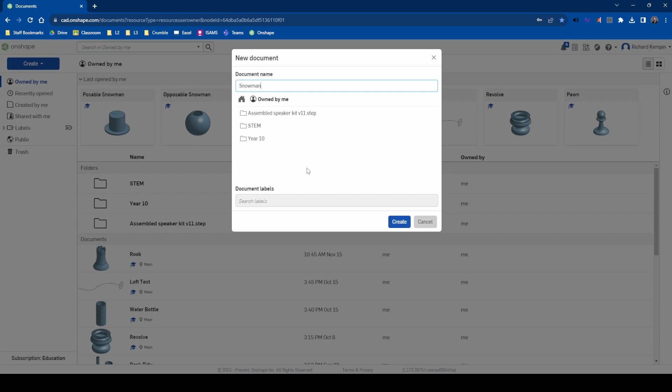To get started, we're going to go to Onshape and create a new document. You can call this a posable snowman, or just snowman. If you want to put it into a folder, you can—I'm just going to keep it in my own section for now.

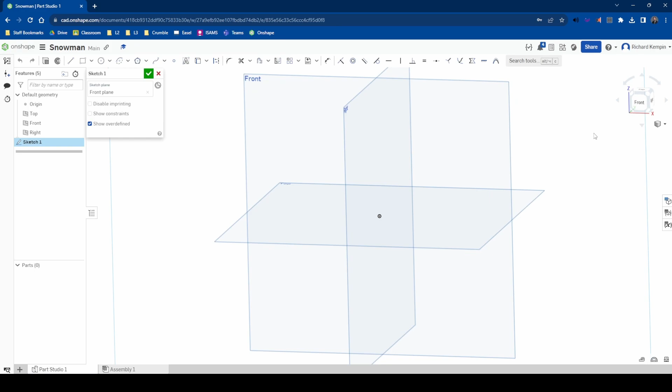Once this opens, we're going to start with the first part, which is going to be the base piece. We're going to click on our front plane, click sketch to create a new sketch, and click on the front orientation to make sure we're looking square on at what we're drawing. It's important to stay away from the right click button on the mouse, as clicking that might accidentally drag you out of orientation, making your views a little harder. If this happens, just click on the front orientation block and you're back to where you need to be.

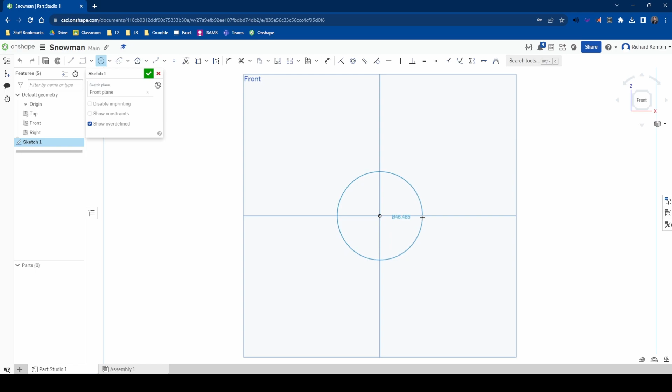So we're going to start with a circle—shortcut key C, or you can click up here for circle—and use the central coordinate system, the central point on the axis here. We click, drag out, and click again. While the white box is active, we type in the dimensions we want. For this first one, we want a diameter of 50 millimeters, so type 50 and press enter.

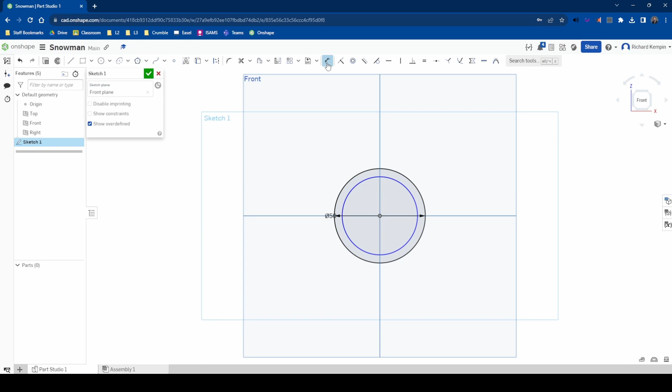We're going to do the same thing again on that same center point, and click again. If you miss this white box and it goes blank, you can press D for the dimension tool, or find it up here. Click on that, click on your circle, and it'll give you the ability to give a dimension. For that, we want 48. This will give us a wall thickness of 1 millimeter all the way around.

We're now going to draw two lines across the bottom. We want them both intersecting both circles. As I hold my mouse there, my line is not blue, but blue and yellow dashed. If I move it away from where I've got it, it becomes blue again. If I hold it here, it's blue and yellow dashed, meaning it's perfectly horizontal, which is what we want—a nice flat line to hold our circle in the correct orientation.

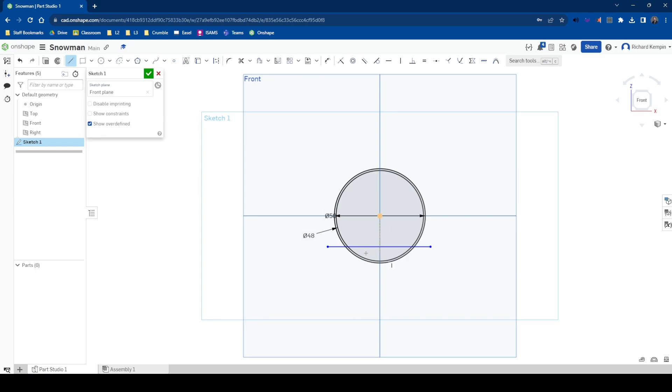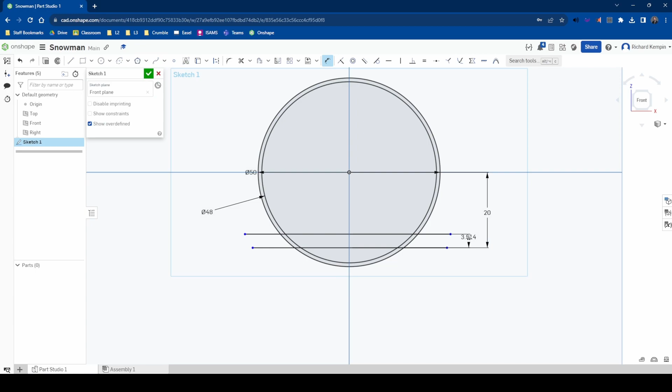I'm going to press the L button twice to clear and get my line tool back again, and draw another line below it with the yellow and blue dashes to make it click. I'll go to my dimension tool and dimension the bottom line from the center point—clicking on the bottom line first, the center point second—and make this 20. I'll do the same again, clicking the bottom line first and then the second line, making this 2. Press enter to finish, and I've got a fair amount of what I need done now.

The next thing is to draw another circle, hovering it on that central line above my circle. Notice how the line between my cursor and the center of the circle has gone yellow and blue dotted again, showing that I'm directly above it, vertically in line. I click, move out, and click, and make this dimension 40.

The next thing for me to do is go back to my dimension tool and click the center of this circle to the center of this circle, and the distance again is going to be 40.

I can now do one last thing, which is my line tool, and I'm going to draw a straight line from the center point down to this bottom line here. That's all the drawing I need to do.

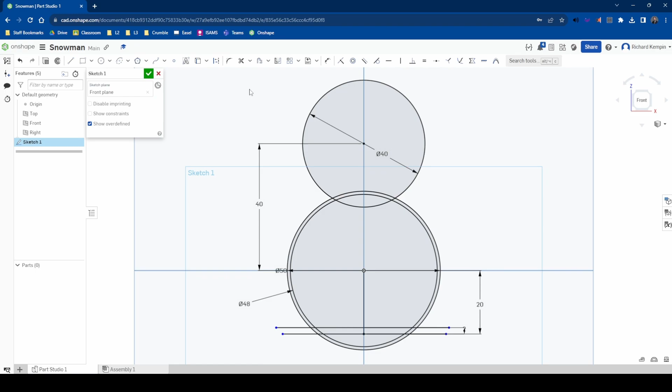So I now need to start removing some of these lines because it's a bit confusing. So I'm going to go to my trim tool, and I'm first off going to trim away this circle, but I'm leaving these two bits here. I'm then going to trim away the parts in between them. And to move around, by the way, I'm pressing down the middle mouse button and dragging. This gives me my pan feature.

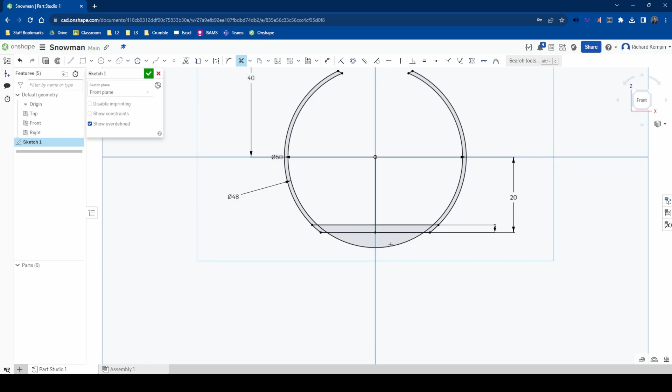I'm now going to remove these bits around the outside here of these lines. I'm now going to remove the bottom bits of this circle. And finally, I'm going to remove the inside bits of these lines here. I've now got this shape left over. Because I've got this line here, I can get rid of this bit here. And I'm going to use this line and 1/2 of what we've drawn to make our first shape.

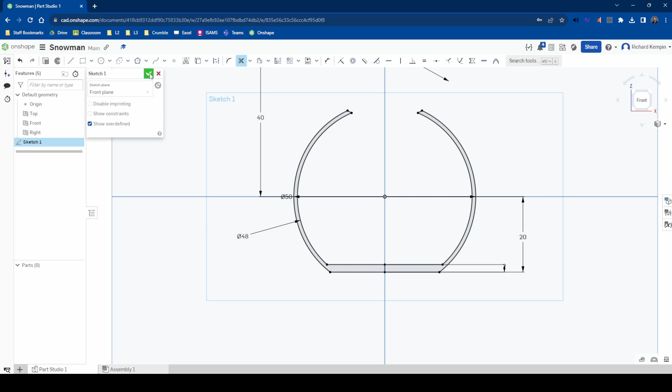And I can exit this sketch now by pressing the green tick button. Press the green tick, not the red X. The green tick will finish it, the red X will cancel it. So I press the green tick button and I've got this sketch profile. I'll zoom out a little bit, and now I'm going to use the right click mouse button just to shift my orientation slightly. You'll see why I've done this in a second.

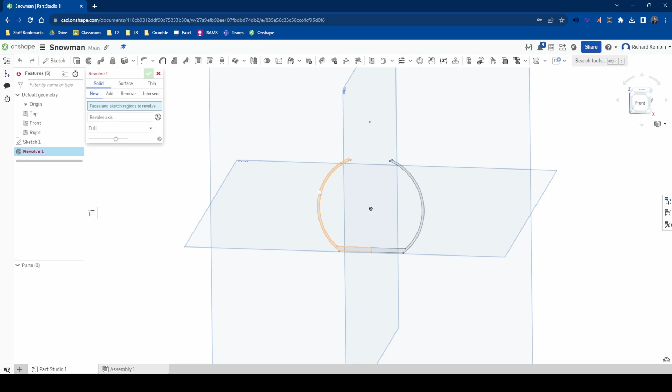I'm going to go to my revolve tool. My revolve tool allows me to pick a profile and revolve it around a central axis. So I'm going to pick this profile here. It's just 1/2 of what I've drawn. And now I want my revolve axis. My revolve axis is this line here.

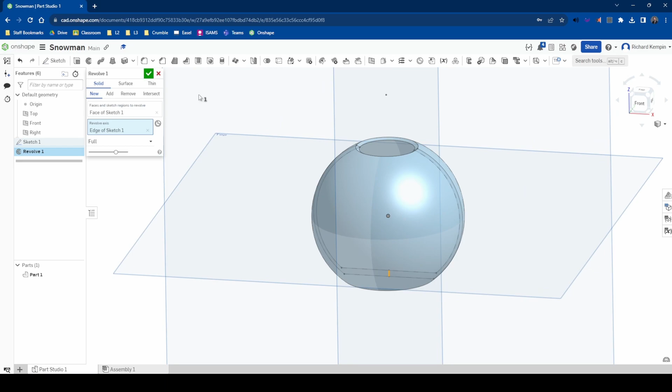And this is why I've gone slightly off into a 3D orientation, so I can see that it's come to a nice 3D shape. I've got a flat bottom, I've got my hole in the top with a slight curve to it. That's going to be the same diameter as the next part we're going to make. This is our base. I'll press my green tick to complete that, and that is part 1 done.

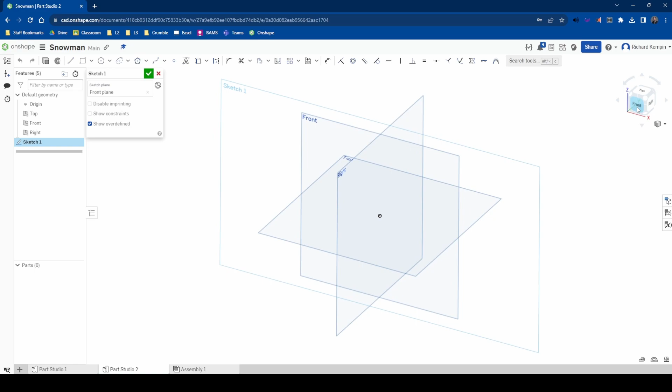Right, now for part 2. To make a second part, we're going to press the new insert tab button down the bottom left hand corner here, the plus, and create part studio. So that's going to give us an additional part. Once that's loaded up, we're going to go into this and start drawing part number 2. So the same as before, press the front plane, press sketch, and press the front view on the orientation block, and we're now looking here.

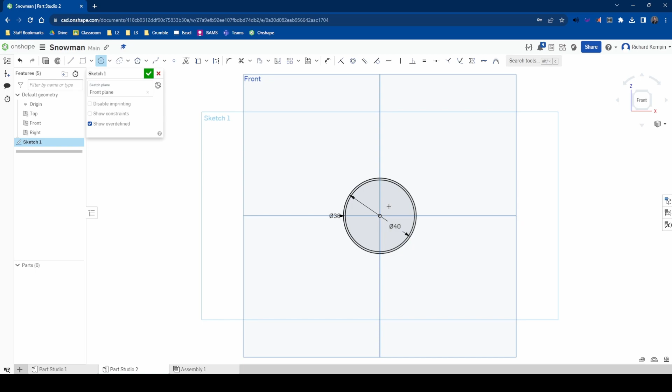So we're going to make a circle with the same center point, bring it out and type 40. We've got another circle inside it, and this one's going to be 38. Oh, that is off center. We don't want that. So we'll try that again. So make sure you hover over the center point there and click out. One of the biggest advantages of CAD is you can just undo and redo and you're not going to lose anything. We want another circle up top here.

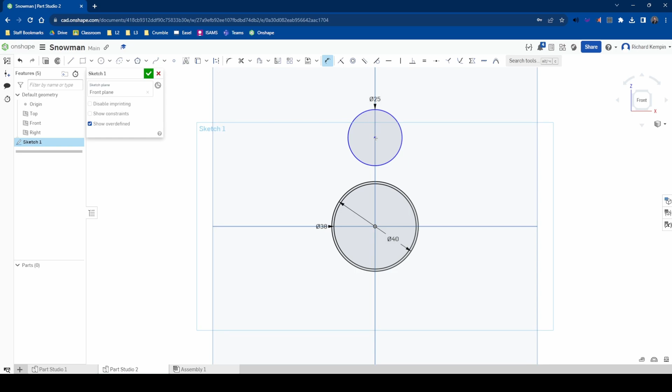Again, you can see the yellow and blue dashed line. That tells me that I'm perfectly in line with the center point. I click, I drag, and I'm going to make this 25. Now we're going to take our dimension tool and dimension the center of this to the center of that, and we're going to make that 30, and that gives us a small little groove for part number 3 to sit in.

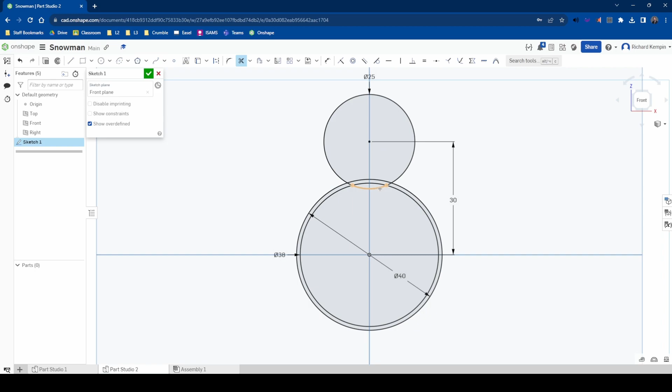And just like before, we're going to go to our trim tool, shortcut T, and we're going to trim away what we don't want, which is all the lines or curves there and the top bit there. And that's the first part of part number 2 done. We can finish that off. We can go to our, oh, we have missed something. So if you spotted what I've missed, well done. I need to go back and add my line in the center here.

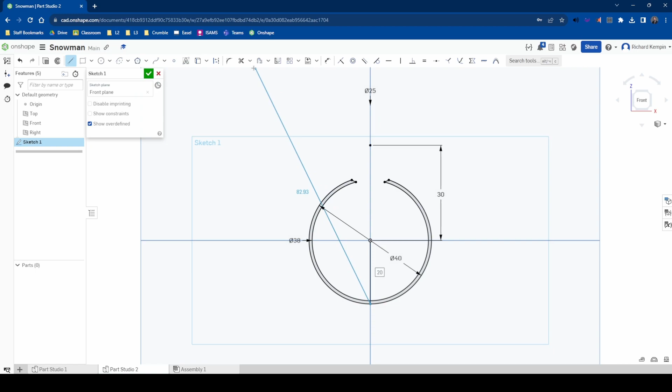So I'm going to right click on the sketch and I'm going to edit. This is a really handy tool if you ever need to go back and edit a sketch, add something to it. I can press my line tool. I'm going to do my line from the center straight down to the bottom there. Go to my trim tool and trim away what I don't need. I can go back to the green tick and finish it again, and now I'm done with that part.

So I can go to my revolve. I can select my profile and my axis, and if I hadn't gone back and added that line, I wouldn't be able to do this part here. So that's now revolved round, and that's looking really nice.

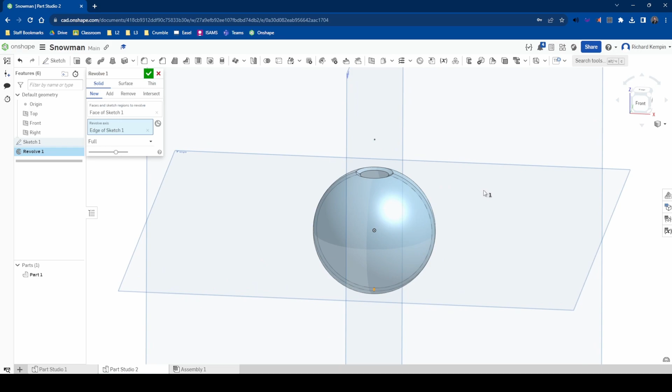Right, we could come back later on and do this. Right, we're going to come back to this part later and we're going to add some more details once we've got the main body assembled. So we're now going to jump straight onto part number 3.

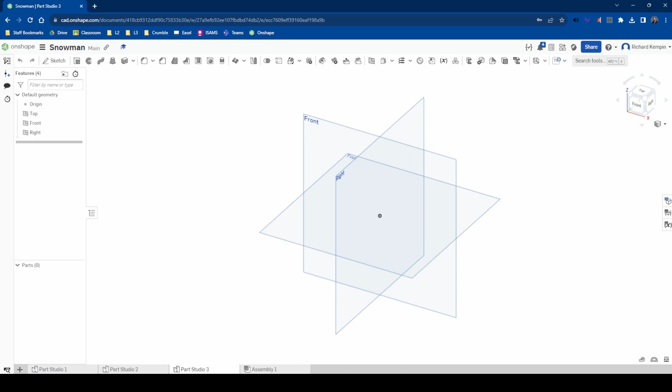So part number 3, insert a new tab, create part studio, wait for it to load, and we're ready to start drawing our next sketch. To do that, again, click on the front plane, press sketch, and click on front on the orientation block, and we're ready to get started. So this is a nice easy one. We're just going to draw 2 circles,

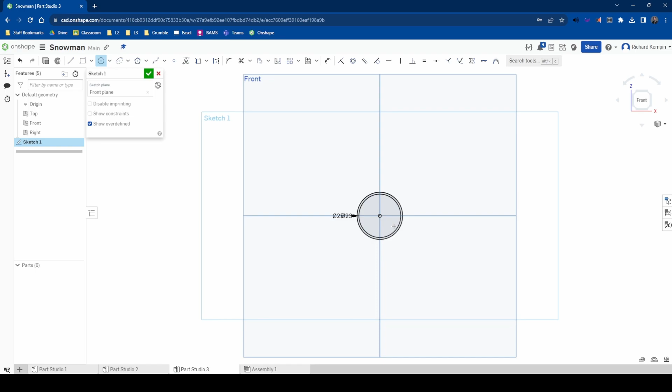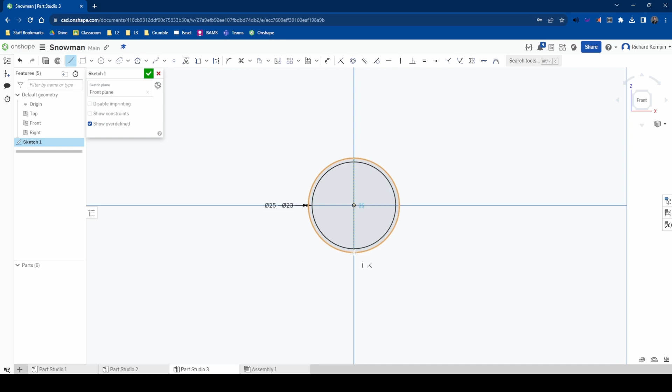one, and this is going to be 25, and then another circle, same center point, and this one's going to be 23. We need a line going through the center, and if you notice, if I hover on the top of that circle there, I've got my blue dotted line showing me I'm in perfect orientation with the top, and it's going to attach to that top line because that line is highlighted. I can click once, drag down, and I'll click again with the circle highlighted again, and that means that the nodes from what I've drawn are locked to those 2 points there.

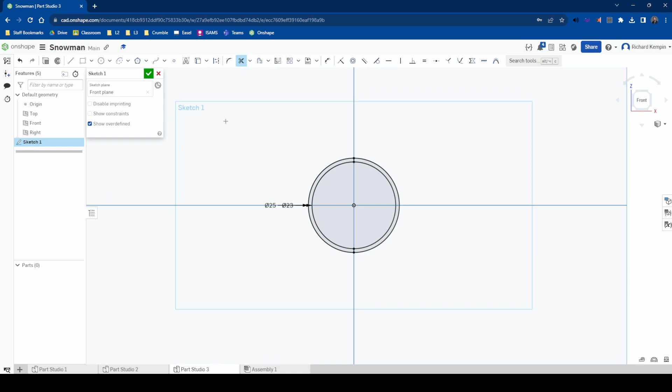I can press my trim tool, I can trim away the inside lines there, and what I can do if I want to is I can get rid of 1/2 of this. I'm going to leave it here to show you that I'm only going to use what I need and to save time for you, but it's up to you. If you want to get rid of that just to make sure, or you want to leave it there, it's fine.

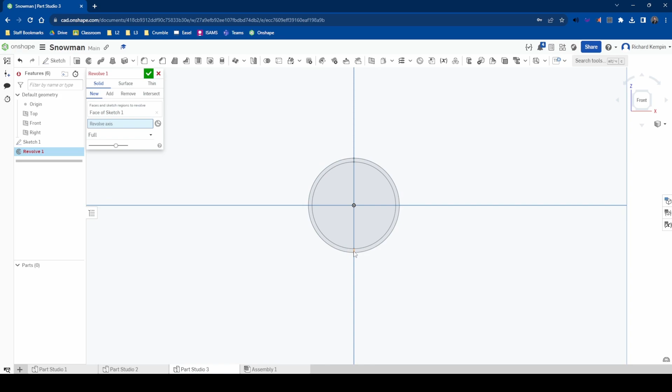So I'll go to my revolve tool again, and if you do leave it all there like I've done, be careful what it is you're selecting. So I'm selecting this profile here. If I selected this profile or this profile, something different might happen. Either of these outside profiles are fine, inside profile, don't select that. So by clicking here, and then my axis, as you might have hopefully guessed, is this line here or this line up here, and I've got a nice sphere. All done.

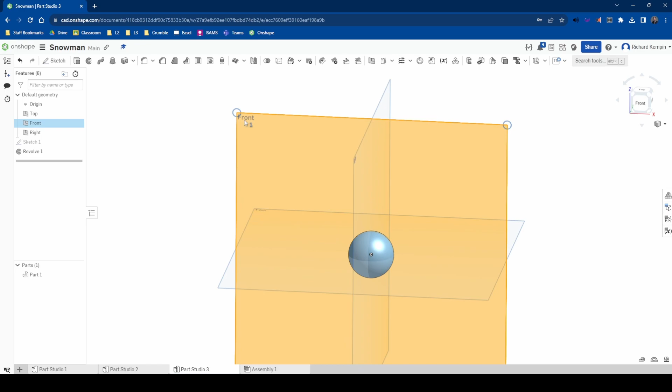We're going to add a little bit of detail to this one now while we're here, just because this is going to help us see what it is we're working with. So we're going to add a face to this. So we'll click on the front plane, click on sketch, and click back on the front face of the block, and we'll zoom in a little bit. So we want to do some relief cutting, so we're going to cut away a face. And we'll make it nice and simple.

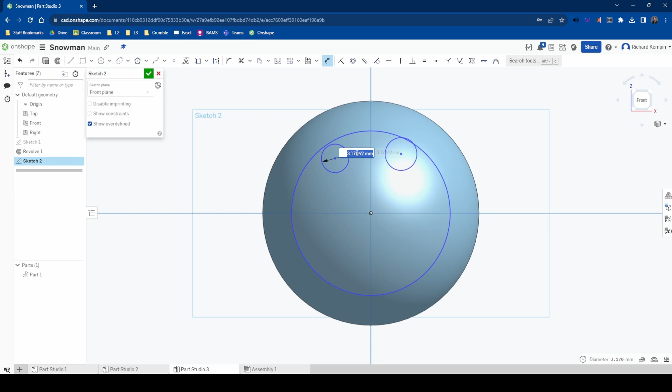I'm going to draw a circle here, a circle here, and from that central point, I'll draw a circle out to about here. And it might look a little bit skew right now, but it will make a little bit more sense. So with our dimension tool, I'll dimension the size of these eye holes here, and we'll go for 3mm. And with that one, we'll go for 3mm. And then we're going to do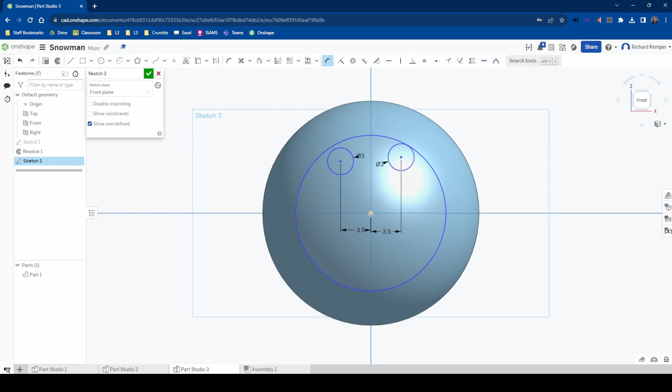center point to center point, but I'm going to make sure I drag my mouse down, and we're going to go 3.5 there. I'll do the same thing for this one, center point to center point, but instead of keeping that diagonal line, I'm going to go straight down and make it 3.5. And then I'm going to do the same thing again, center point to center point, but I'm going to go across this time, making sure my measurements are up and down. I'm going to go 6, and the same thing here, center point to center point, and make that 6.

With this circle here, it's not too particular where it is, but we'll call that 17.5, and I want a line, and the line can be virtually anywhere you want it, depending how big you want the smile. I'm going to have mine approximately here, but I do have my dotted line going across. Now you could have a massive smile like that, but I'm going to use a different tool to make my smile.

So I'm going to go over to my arc tool. I'm going to go to my 3-point arc. So it's the 3-point arc tool here, shortcut A, and I'm going to do the first click on the node of that line, the second click on that part of the line there, and here's now where I choose how big my cheesy grin is going to be. I'm going to make it about that. That looks good to me.

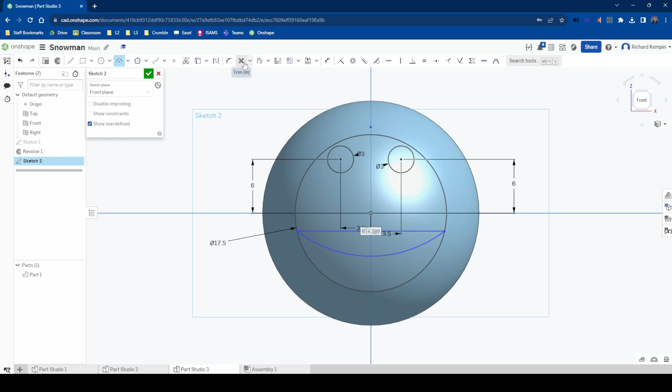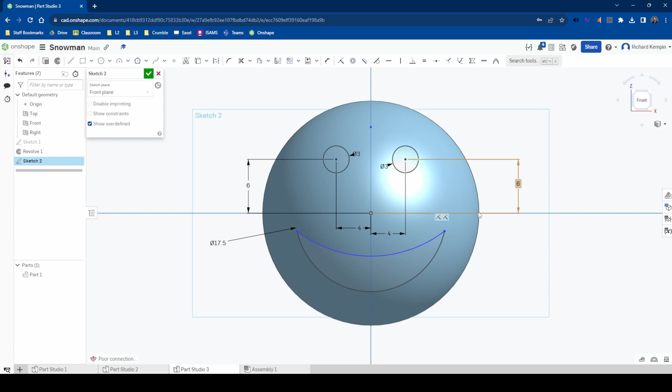I can get my trim tool, and I can trim away that circle and that line there, and I've got a nice cheesy grin, and I've got 2 eyes. If you want to adjust these measurements, you can. So looking at this, I might think those eyes look a little bit too close together, so I might make them 4 on each of them, and it updates it for you, it moves it around. Again, CAD being a fantastic tool that we can use. I'm going to exit that sketch.

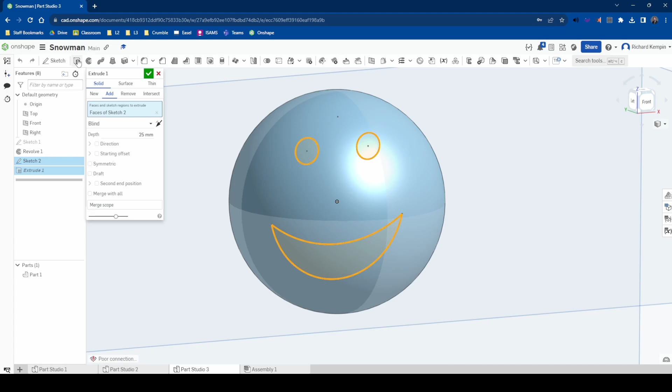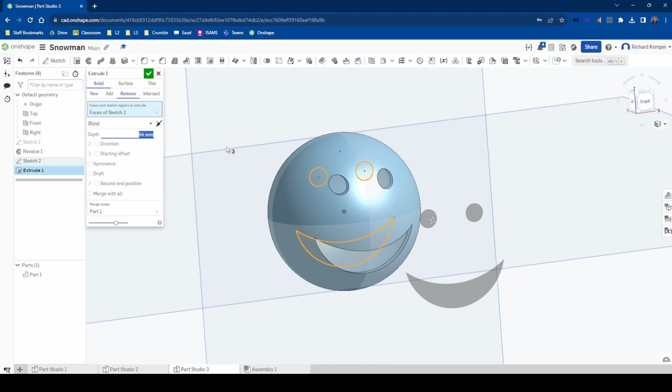Now I can't actually select those profiles very easily, but I can select the sketch over here. So by selecting the sketch and then going to my extrude tool, it tries to extrude them out, make them a 3D boss from the shape there, but I want to remove. So I'm going to use the remove option here, and it's trying to go the other way. So I'm going to flip the direction, and now it's cutting right through, and we're creating that relief there. So if you notice that I've gone to remove and I've changed the direction. An alternative to that is you can click and drag that arrow in the direction you want it to go. And that's that bit done.

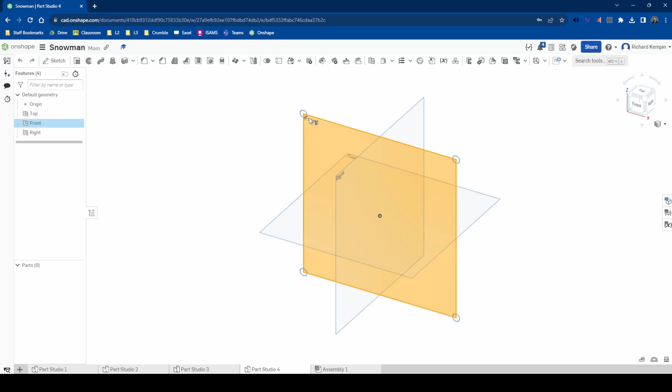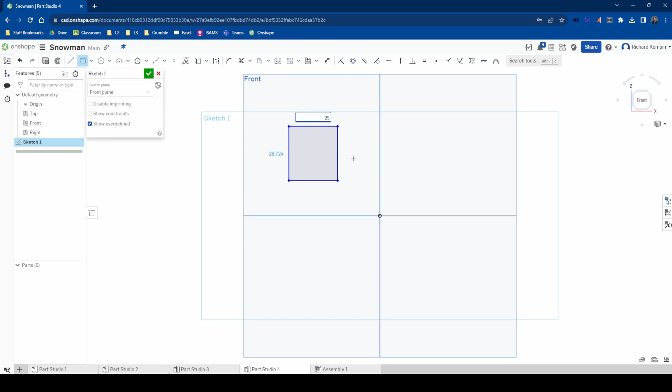We need to make one more part now, and that part we're going to make is going to be a top hat. So we're going to create a new tab, create part studio, wait for it to load, and again click on the front plane, click on sketch, and click on the front face of the orientation block. So we need to make a couple of squares this time. So corner rectangle, and it doesn't matter whereabouts you do this, you can do it up here, down here, or somewhere in the middle, slightly off center, it makes no difference. So I'm going to do mine here, and I'm going to click once, click twice, and my white box appears. So I'm going to make this 25, press enter, and the second white box appears, and I'll make that 25.

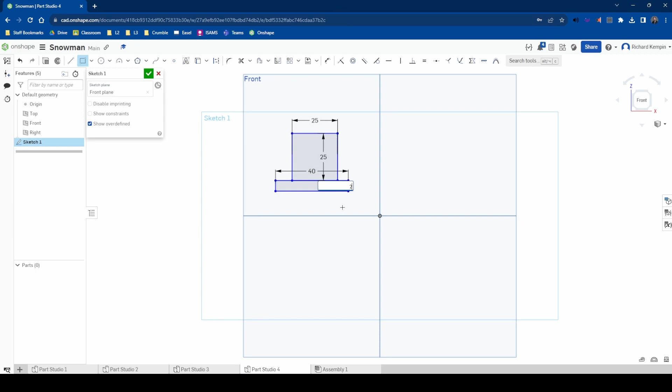Now I'm going to draw another rectangle, and notice how when I hover here, a dotted yellow line appears. That means I'm in line with those nodes and that line that are already there. So I'll click there, and I'll click down there. Now this is saying how wide do you want it to be. Well, I want it to be 40 wide and 2 mil high. But you can see that's definitely off center. So I'm going to get my dimension tool out, and I'm going to dimension that edge to that edge, and I want that to be 7.5. And now that's nicely centered.

I can take my trim tool and I can get rid of these bits on the inside. So that same line there twice, and that's given me everything I wanted there. You might notice I've lost a dimension. I've lost my height dimension from top line to bottom line of the first rectangle because I've got rid of that bottom line. So I'm going to bring that back in by using my dimension tool, dimensioning that edge there, clicking and pressing enter. Just in case I accidentally shift something, things won't go out of proportion.

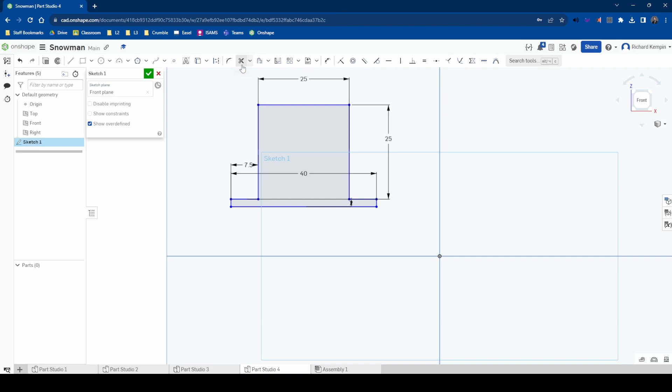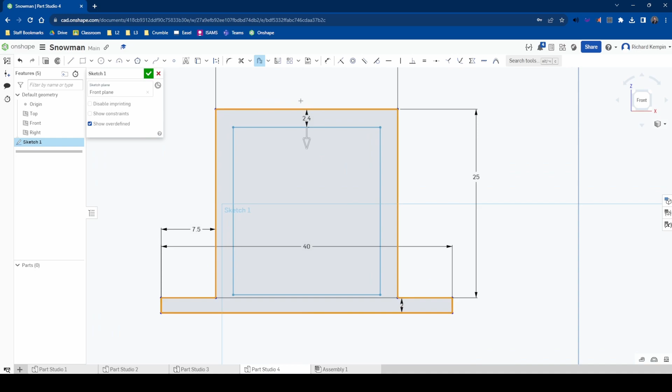Next, we want to make an inside version of this. So we want another rectangle on the inside here. A really quick and easy way of making that is by using the offset tool. So with the offset tool, I can click and drag everything, and it's saying 5mm inside. That's a bit much. We only really want this 1 mil inside. So I can click and drag if I want, try and get it exact, or if I zoom in, I can double click on the measurement there, make that 1, press enter, and I've got a rectangle on the inside. You notice that nothing went inside here, and that is purely because the 1mm inside of that is the same as 1mm inside of that. It would have caused the conflict, so it just kept it on the inside there.

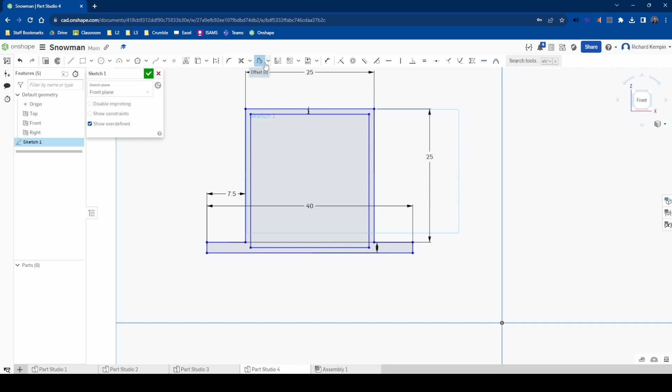I can now use my line tool to go from the center point. I can do it from the center point at the top, or the center point at the bottom, or the center point of here. It doesn't matter. But I'll go from the center point at the top all the way through. Nice straight line, so it's hovering yellow and blue dotted, and click there. I'm going to go to my circle tool, and on the line, not at the end of it, but on it, I'm going to click and click away.

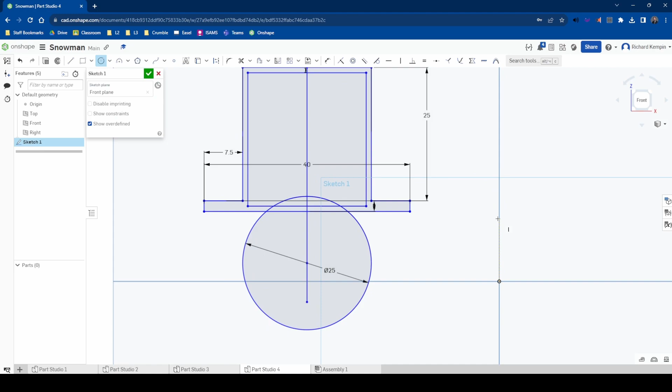And I'm going to make this 25, and you'll notice that that's the same diameter as the head we made. And the last thing we're going to do is we're going to choose how far down this is going to go. So we're basically deciding how far down the head we want the top hat to sit. And so with my dimension tool, center of that circle to the bottom of that line, and I'm going to make this 8. So it's going to sit a little way down, give it a shade.

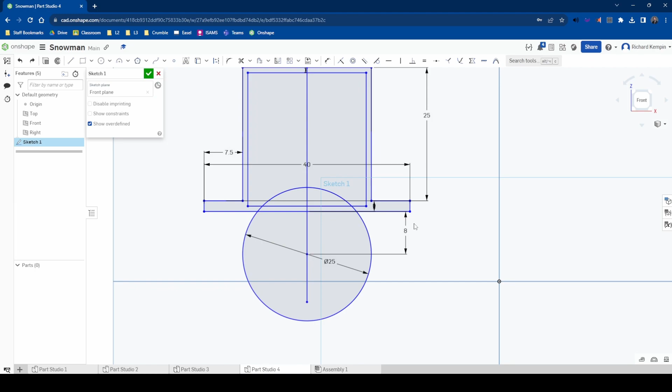If you want it to sit higher up, you can just make that number larger. So you might want to go 9 or 10, just so it sits a bit higher. I'm going to stick with 8. I think 8's a good measurement for me, but you might have a different preference. We can now go to our trim tool and we can start removing things.

Well, we don't need this circle or this part of the circle here, and we don't need these inside bits here, and we don't really need the line. So I might remove that line there and remove that line there. Notice how the dimensions have stayed, because this diameter here is in relation to this curve and this curve, and this dimension here, the 8mm, is in relation to the center point of those curves.

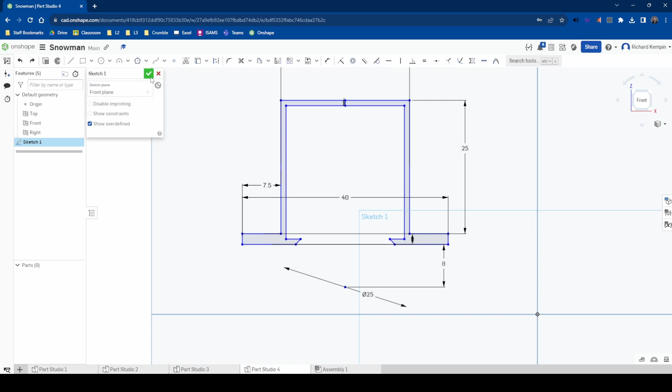So if I did want to update this at a later stage, I can still double click on that 8 and make that 9, and it's going to adjust the measurements for me, or I can take it back to where it was. Okay, we can now exit this, and now we need to do our revolve.

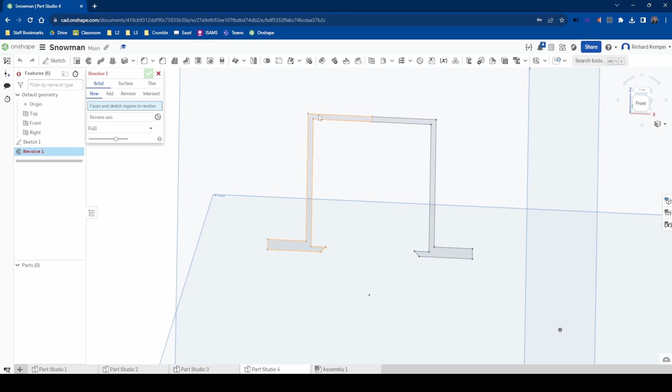Now, while playing around earlier, I did make this work first time, happy days, but then later on it decided it didn't want to work on the second time, so there's a workaround if it doesn't work. Ideally, you press revolve, select your profile, select your axis, and it makes it first time, and that should work perfectly. If it doesn't, on revolve type, you can choose one direction and then the angle,

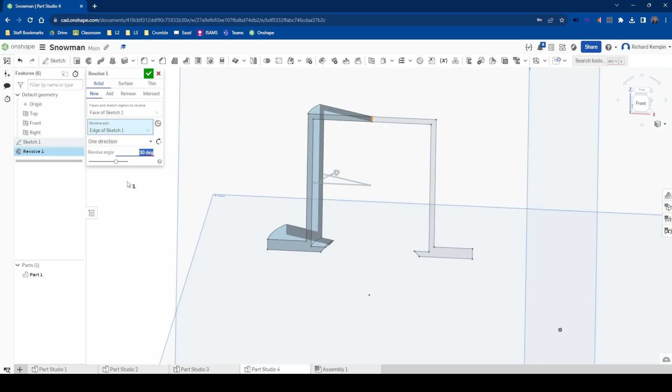and I was having trouble getting it to go the full 360 degrees, so what I did was 359.9999, and it came out with that there and a tiny little line just there. But hopefully you shouldn't need that, and you should be able to go revolve, choose profile, choose central axis, and you've got your top hat.

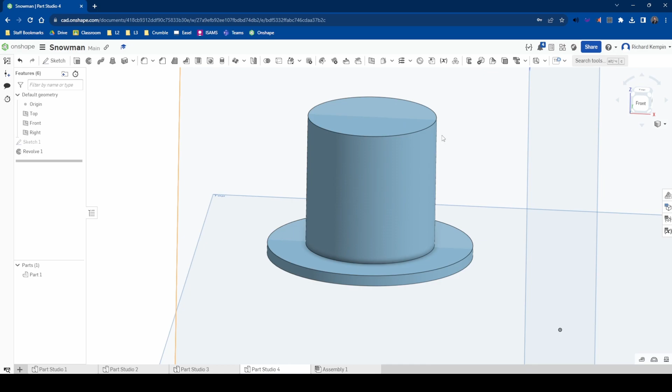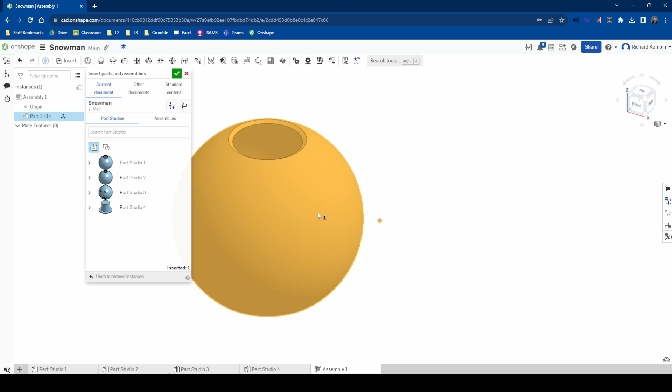Right, we can now start assembling. So in an assembly, we take all the individual parts and we place them together using some of these mate or join features up the top here. The first thing we're going to do is we're going to insert part 1. So click on it here and click on the screen. Press the green tick, and that is part 1 inserted. I'm not moving the part, I'm moving the screen. You can see by the orientation block in the top right hand corner, I'm moving the screen around.

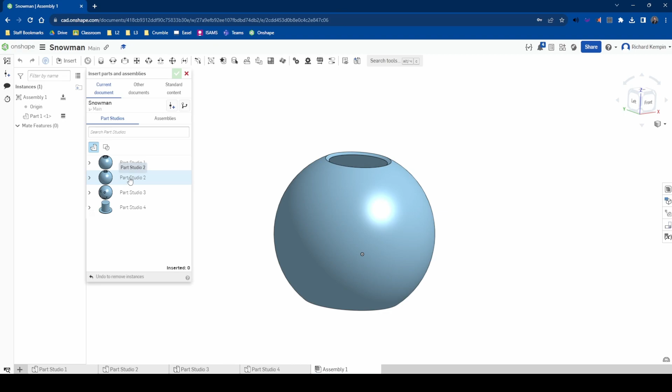I want this to stay exactly where it is. I don't want it to move around. So I'm going to right click on the part and I'm going to go to this option fix, and that fixes it in place, which means that it can't be moved. If anything else is moved, they're moved around this. We're now going to insert our second part, and that's going to be part 2, the bulk of the body. And we're going to go back and edit this in a minute.

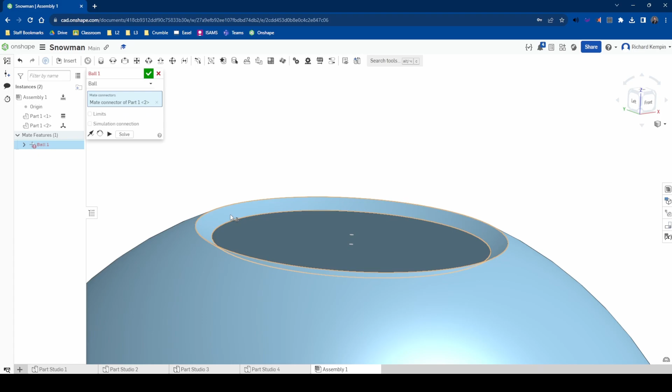So press my green tick, and I'm going to use the feature ball mate. So this takes a spherical object and mates it to a spherical relief, which is what we've got here. These aren't straight lines, these are curves. So click on that, and that is now in place. I'm going to do the same, insert part 3, and I'm going to use my ball mate feature.

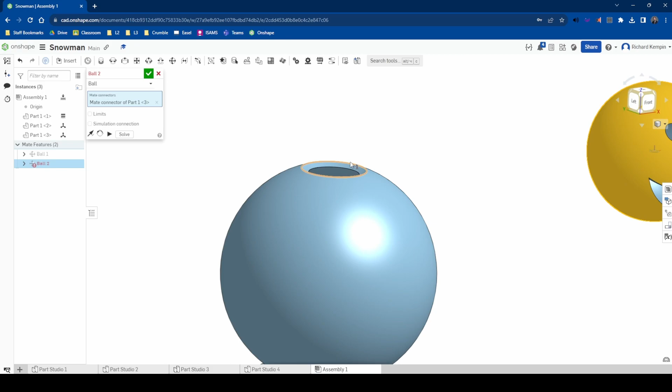Oh, it didn't work for that reason. So click on that part, there we go, and now click on that one, and that's in place. And you can see that if I start moving, the head moves around, and so does the body. And the last thing we're going to do is we're going to insert part 4, which is our top hat.

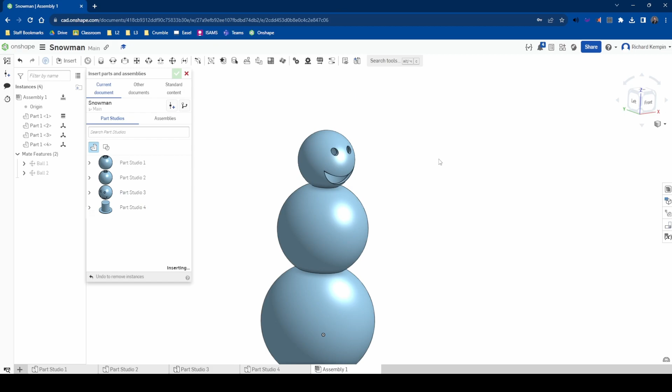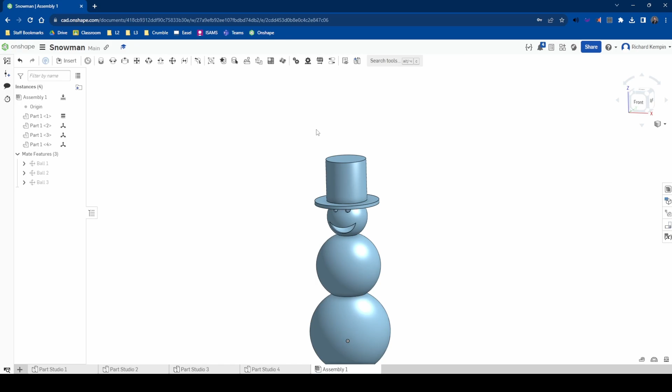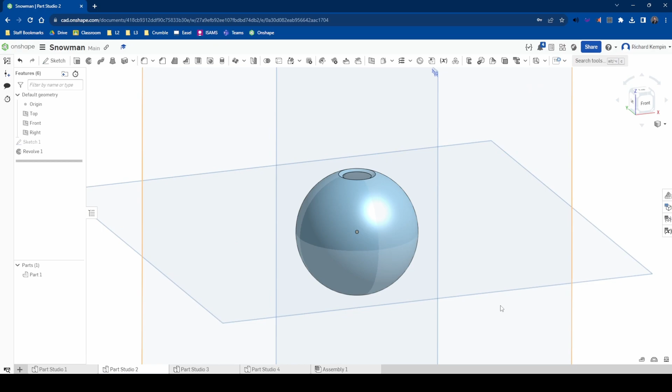Now if you remember correctly, my original one that I showed you earlier had 3 buttons on here. This is a nice little addition. If you want to skip this step, by all means do so. Otherwise, follow me along and let's add some little buttons on here to give it a little bit of detail. So we're going to go back to part 2, because part 2 is looking a little bit bland. And we're going to look at the front. We're going to click on the front and we're going to click sketch.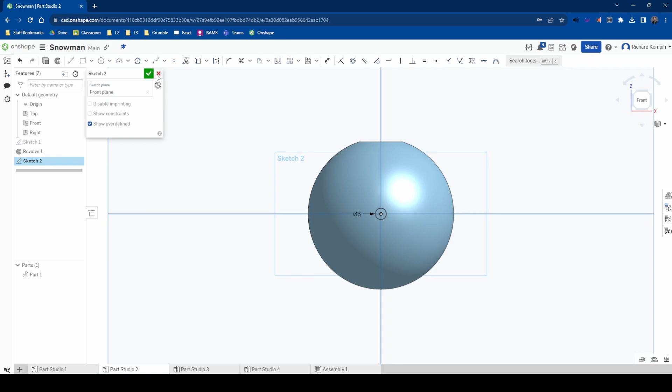Now on this front sketch, I'm going to draw a circle smack bang in the center, and I'm going to make it 2.5 millimeters in diameter. That looks a bit small. Okay, perhaps we'll double click on that and make that 3. So I've got that there. I'm going to press the green tick. That's that done. And because I've got the hole in the top, I can actually access that profile if I need to, or the shortcut, an easy way is just to press the sketch.

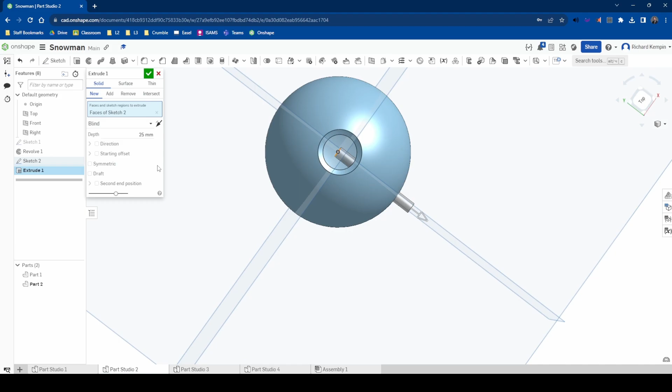I'm going to press extrude, but this time I'm going to do new. And there's a reason I'm selecting new. Because there's something I'm going to do afterwards, I need this to be a new feature, and then we're going to combine them together again. So I don't want this to go all the way. So we're going to do a starting offset, and the starting offset is 19 millimeters. That's going to bring it just inside that body there. This means it's going to merge eventually when we tell it to.

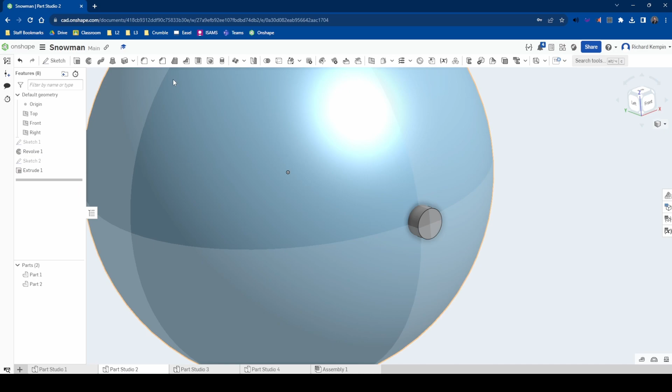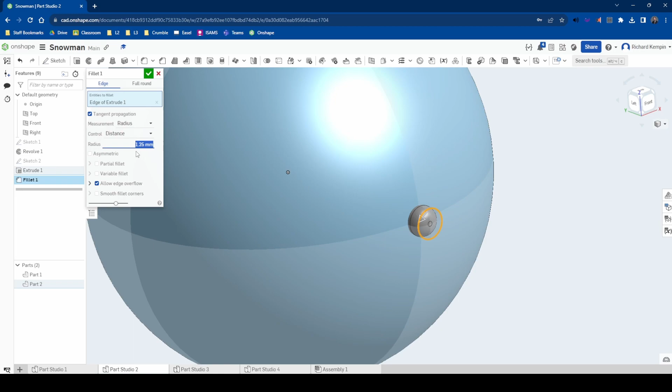And I only want this to be 2.5 mil deep. Let's have a look at this. Yeah, that looks about right. 2.5 mil. And we're now going to use a feature called fillet. This is going to round the edges because we want this to look quite nice. So I'm going to press that fillet there, and I can drag that down either by hand, or I can manually put that in there at 1.2. Maybe 1.25. 1.5. Oh, there we go. 1.5 makes it nice and round. And press the green tick. And there we go. We have one button.

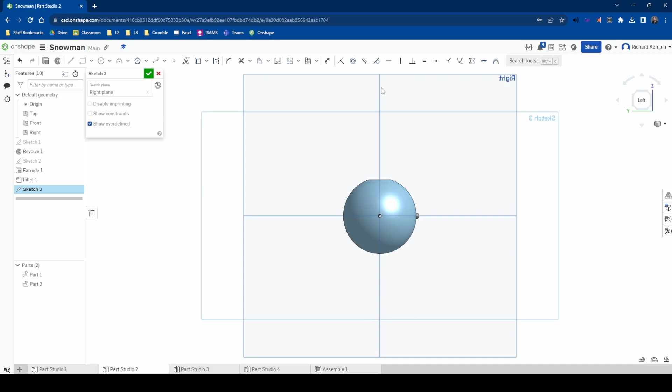It's something, but it's not enough. So we're now going to create multiple versions of that. But first, we need to add a new something in there. We're going to look at the left-hand side and we're going to sketch on the right plane. And I'm going to draw my circle from the center point. I can make it bigger or smaller, it doesn't matter, but I'll make it bigger so it's nice and easy for us to see. So I've got my circle there, and I'm going to go to my pattern tool.

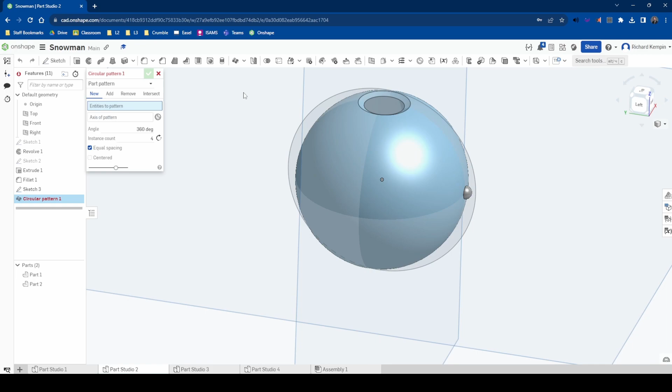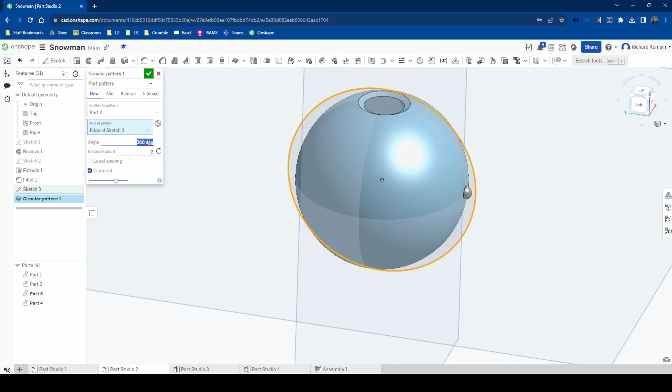Now yours probably looks like that, the linear pattern. We're going to drop down and go to circular pattern. It wants to know what entities to pattern. Well, I want you to pattern part number 2, including the extrude and the fillet. Axis of pattern, I want this to be my axis, and it automatically tries to give me 4 equally spaced across the whole thing. That's not what we're going for. So we're going to deselect equal spacing, select centered, and we want 2, and we're going to make this 25 degrees. And now we've got 3 nice buttons in the middle that look quite good. So we'll go with that.

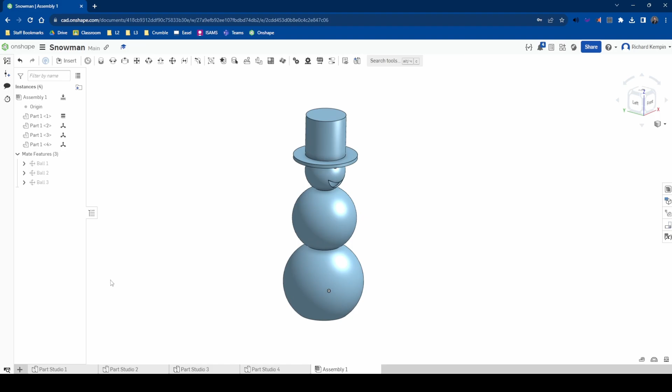Press the green tick. Now you can notice that these are grey and the main body is blue. If I go to my assembly, they haven't appeared. Look all the way around. Nope, it's definitely not there. And that's because they're not part of the same part. You can see they're all separate parts here. But what I can do is click on each one individually. They all get added. I can right click and go to Boolean.

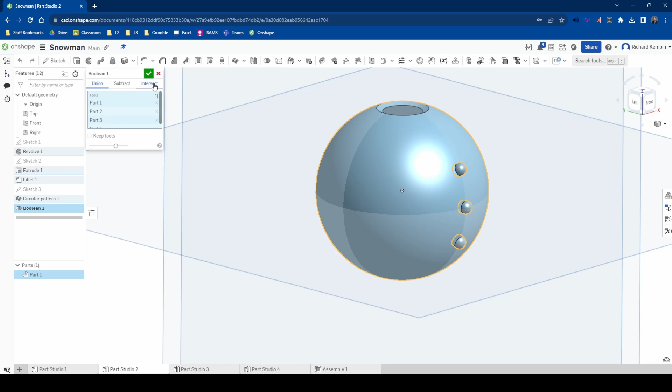Boolean is a mathematical operation that allows you to intersect, subtract, or union. And that means we can join them together. Press the green tick. And now they've all gone blue. They're all part of the same part. If I go to assembly, it's automatically updated. And there are my 3 buttons on the body. That is how we make and assemble the snowman in Onshape.

The next video will show you how we export each of these parts ready to be 3D printed so that we can 3D print this feature.